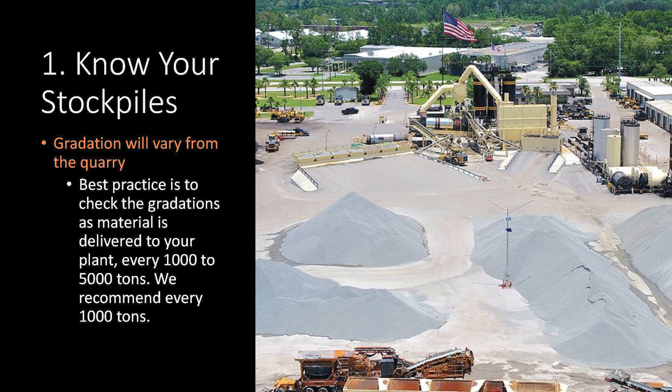So a very important part of being effective producers is knowing those stockpiles and knowing the gradations within them. Best practice always says to check the gradations of incoming material every 1,000 to 5,000 tons. We recommend every 1,000 tons, or we do it every 1,000 tons. If things are critical, like after COVID when we went through logistics issues and were getting hand-to-mouth aggregate, then we tested it daily as it came in because you didn't know what you were getting. So it depends on the circumstances as to when you want to pay close attention to these gradations, but it's a major part of it.

This has to work on both the plant side and the QC side. Of course the QC is going to be doing the testing, but the plant has to recognize when this aggregate is coming in and make sure those tests get done.

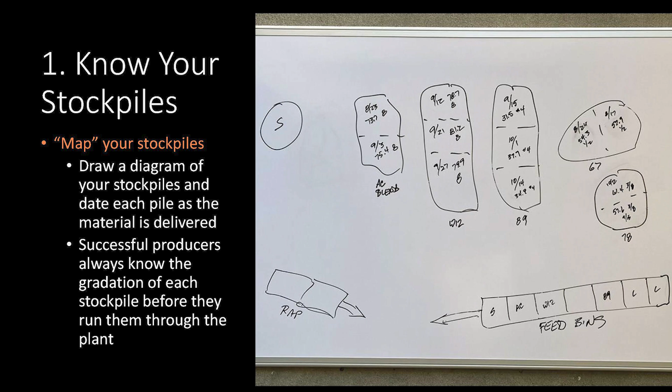This seems kind of crude, but this is the whiteboard in my lab. When the aggregate is delivered, we run our tests. We try to get a minimum of 10 tests, get a 10 average, and get our sieve result for the size of stone we're bringing in. We have notches in our stockpiles, shown as those little dotted lines, with dates and the gradation of the target sieve we're looking for.

As we pay attention to our stockpiles while producing, and we get back to that part of the stockpile, we know we might have a change coming up because we might have a different target or gradation on that target sieve. That's why we put this up on the board and keep up with it. A dry erase board, it's easy to do.

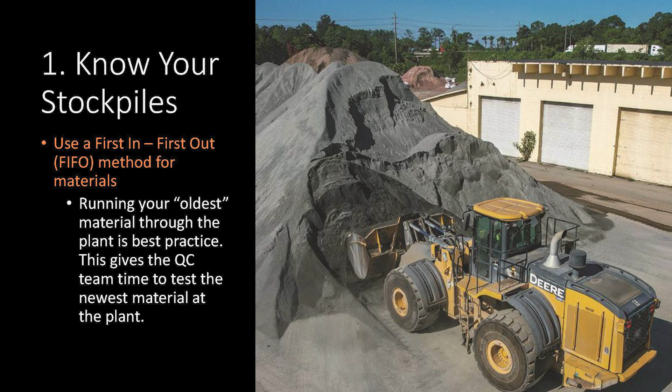We always use a first in, first out method. Picture our plant: US 1 is out front, and trucks come in and deliver, so naturally they put the aggregate on the front of those piles. Then the loader driver digs from the front of those piles and puts it right in the bin, so it's last in, first out at our plant. But we try to make the trucks go around back and take a cell at a time where those notches were, using first in, first out. That way you know what those gradations are.

We separate them into cells like I was talking about, and you can do it left, right, front, center, whatever. As you run out and get into that cell, start recharging it. Leave a little gap so you have time to get your QC test, get at least your 10 samples so you can target that controlling sieve you're looking for. Keeping it separate is the key before you stack it up and pull it all together.

We use blend sheets to adjust our mixes all the time. It's never a call from me or one of my technicians saying, hey, let's take 2 off the 7s and put 2 on the screenings. We always take the gradations that we have.

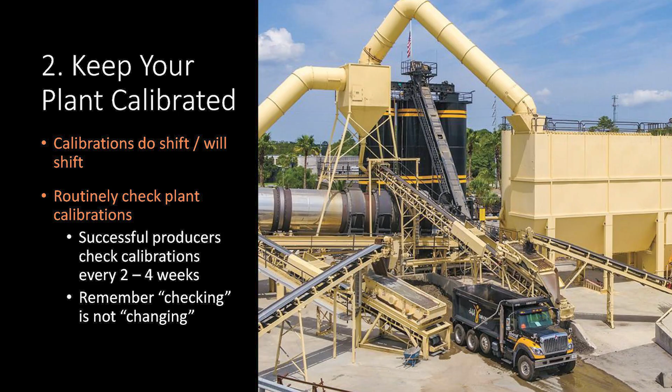Let's talk a little bit about keeping the plant calibrated. Effective producers check calibrations every 2 to 4 weeks. Check them, not change them, just check them. Changing is a lot more involved.

But if you have a day paving that's a little slow, with a 3-hour gap because trucks are going a long way and taking time to come back, you have an opportunity to check a calibration—it might be just one bin. Pull a truck underneath the belt, check the calibration for that one bin, your most popular. You know what you're running, whether you're using 3/8 stone heavy that week, just check it. Check it at a low ton per hour and a high ton per hour. It's very important.

With that, checking those calibrations lets us be proactive. Machines wear out, problems develop—it's just true, it happens all the time. Well, not all the time hopefully, but it happens. We're trying to be, what I like to say, fire marshals instead of firemen. It seems like in the asphalt industry we're putting out fires all the time, and we want to be proactive and be a fire marshal so we don't have to stress ourselves out.

If you do find a problem with your calibration, notify the QC department, because you may have been adjusting that mix, trying to trick it to what the plant's giving you—I call it voodoo asphalt, making some voodoo asphalt. Then the plant folks recalibrate the plant, and next time I run it, it's going to be somewhere else. So let them know, so we can take a belt cut of the rock or whatever and see what our gradations are giving us. Communication is the key.

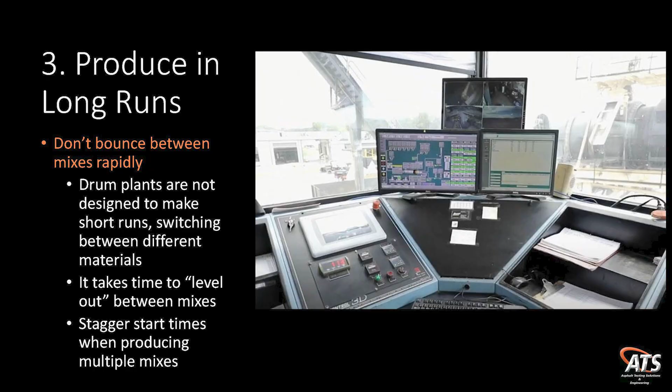Producing long runs - don't bounce between mixes rapidly. Drum plants aren't designed to make short runs, switching between different materials. They take time to level out between mixes, so you may want to stagger your start times. Everyone gets a trucking schedule every day. If you're making 2 or 3 mixes, you want to start one mix, get those trucks out of your yard, go to the next mix, get those trucks out of your yard, and so on and so forth.

Perfect example, a few weeks back, during the middle of the day, we were making 3 mixes at the plant on the north side there, Lance, and had a plant issue. All the trucks came back. We had no mix, got the plant going, and now we got to get those trucks all back out. The plant operator decided to make 2.5 loads of the 9.5, 2.5 loads of the 12.5 40% RAP, and 2.5 loads of the polymer, which is going to a DOT job. Kept going back and forth, back and forth.

Well, the DOT, they sample randomly for our pay. Lo and behold, that sample came on one of those switchover loads. Switching over, boom, air voids fail, 1.5, just terrible, terrible gradation. So instead of the DOT just looking at that one sample or that one situation, they don't know, they weren't there. They have an inspector there, but he's not up in the tower.

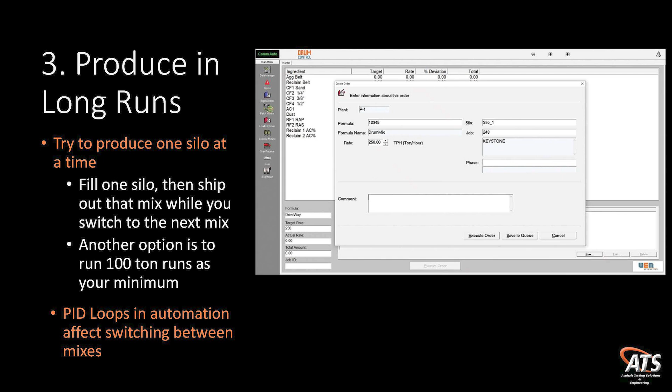Keep that in mind. Try to produce one silo at a time. Fill one silo, then ship out the mix, just like I said. Or another option is just make 100 tons at a time - make 100 tons for this guy or for this crew, get that out the door, make 100 tons for this crew, get that out the door.

That way, at least you know you got that 4 or 5 truckload window in there to know that your plant's leveled out, your mix is on, your mix is good. It's all coated with AC, you got the right gradation, all that.

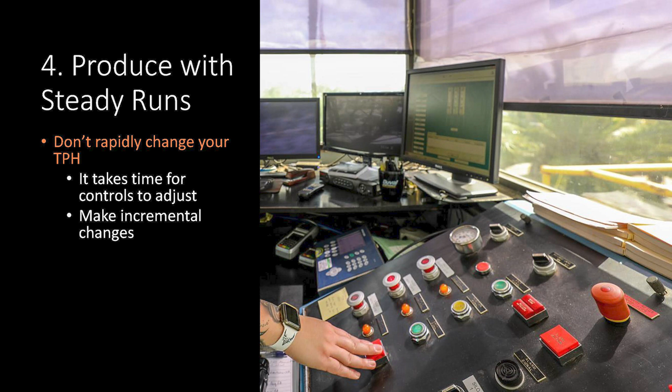Producing steady runs - see this a lot. They get behind, they want to ramp up the tons per hour. So they're clicking along running at 200, 220 ton an hour. They get behind for whatever reason, overtruck the job, whatever it is, and immediately just set the plant at 300 tons an hour. Well, you're going to get some of that voodoo asphalt in between there. If you get caught on a random sample on DOT, guess what - the milling machine's behind the paver instead of in front of the paver, which is what we don't want.

Make sure you're running your tons per hour. If we got to go up, that's what they're made to do, go faster and faster, slower and slower - even going up or down, small increments, go up 20, 25 tons an hour. Just increase slowly, let it level out, increase slowly, level out, or decrease slowly and let it level out.

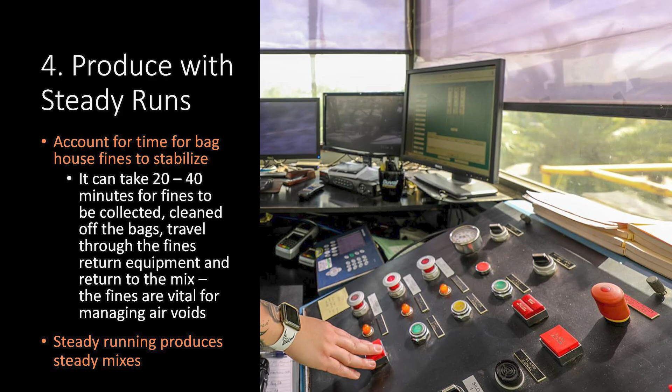The reason why - it can take 20 to 40 minutes for fines to be collected, cleaned off the bags, travel through the fines return equipment, and return to the mix. And the fines are vital for controlling air voids. They're vital to the mix. We love our fines - it kind of acts like AC, helps us fill some voids in there.

And I see some mix designers in there shaking their heads. One of my mix designers back there, we had dinner last night - you like those fines too, don't you? Oh yeah, unless they're too much, then they're blowing the air voids.

Steady running produces steady mixes. So that plant we started up, we got it nailed. We're running 240 tons an hour, and we can run that all day long. Everything, the plant's calibrated, we know our stockpiles, we got good mixes. You can make great mix all day long. When we stop and start is when we run into issues.

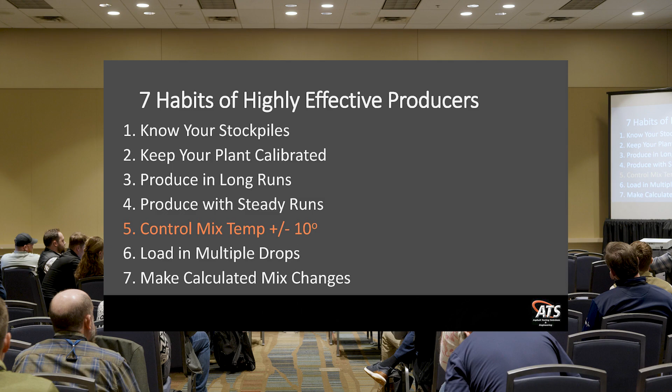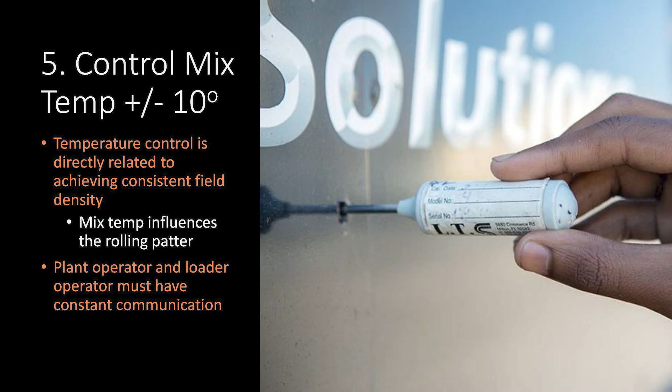So what about the temperature? Effective producers at the plant control their mix temperature plus or minus 10 degrees. Is that possible? I see my plant guy shaking his head yeah. I've had plant guys tell me you can't do it, there's no way. Well, if you lay a $50 bill on that console and say you can control it within 10 or 15 degrees, you get that $50 bill, he'll do it every time. Guarantee you. It can be done, it needs to be done.

Temperature is very important out in the field for getting density of our mix. That's the most important part of that mix. When it gets to that paver out there, we've got to get density, right? Super pave works at temperature. Trust me, if you've got consistent temperature load to load to load, you're going to get consistent density out on the road. You get cold load, hot load, cold load, hot load, your density is going to be all over the place. It's a proven fact.

In Florida, we break down our pay quality characteristics: 8 sieve, 200 sieve, asphalt content, air voids, and density. Density is 40% of our pay, that's how much they stress it in Florida. Our good friends at the Asphalt Institute tell us you can take the worst made mix, get great density on it, and it'll last you 18 to 20 years. And you can take the best made mix, put it out there, not get good density, and it'll tear up in 10 years. So that's how much it means.

Temperature is the number one thing to help you at the plant to getting it out there. A lot of that is the plant operator and loader operator constantly keeping in contact. We don't want any bins to run out, especially if we're making a RAP mix. The RAP runs out, we're in trouble.

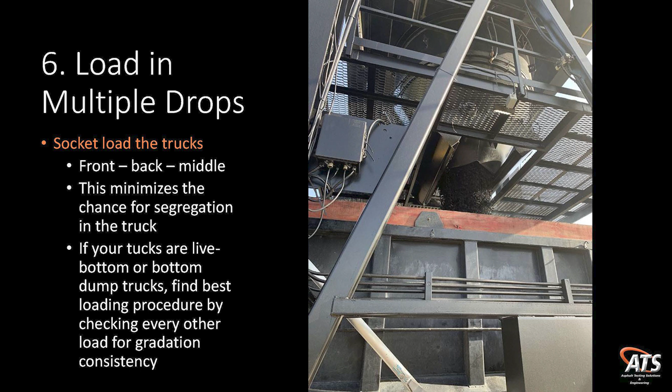Let's talk a little bit about loading those trucks. Load in multiple drops, we do 3 at all our plants. I've seen people do 2, I like 3 better, and we do a socket. You know what a socket is? We pull the truck up, get a drop in the front part of the truck, pull it all the way up, a drop in the back, back it up, and put one right in the middle. So you've got 3 humps in there.

This helps reduce segregation when we get out to the paver. When we put it in the paver, we know we've got 3 good drops in there. Chances are that mix is not segregated unless something was happening up in the silo with the batcher or whatnot. But chances are that if we load these right, we're going to keep our temperature and eliminate segregation.

I don't know if y'all use live bottom or belly dump trucks up here. You need to play with those a little bit and see the best way to load them to prevent segregation, because they all work a little differently. Some are V-bottomed and some are square-bottomed, and some hold 24 tons.

They've recently gotten into that in Florida, West Florida, and the central part of the state. They call it the belly dump, where they dump a windrow of asphalt out in the middle of the road, and they come by with the paver and pick it up. It's pretty neat stuff, but I've seen it and never been involved in it. I saw it when I was with the DOT.

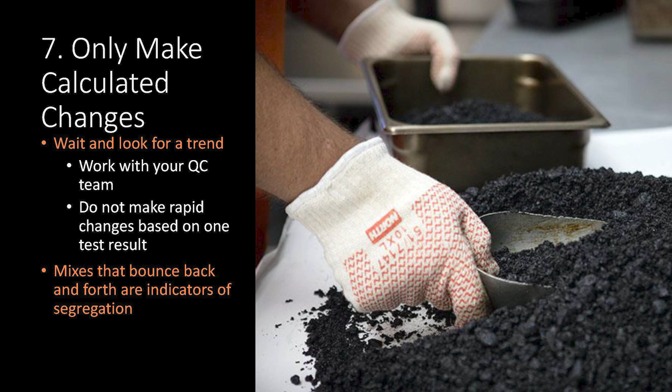Effective producers are going to make calculated mix changes. They're going to wait and look for a trend, work with your QC team. So if we're getting bad results, if we just get one bad AC reading that's kind of weird, we're not just all of a sudden going to add AC to the plant, or take it out. We're going to pull another sample. No knee-jerk reactions, because anything could have happened, it's a big machine. So we want to validate that result we just got. We don't want to make a rash mix design change.

There are times in the middle of the night and you're trying to protect yourself. If you pull a process control sample and air voids are looking a little high, we might want to put a tenth of AC in to bring those down as a quick fix. That's kind of different, but even those, I don't like them. I like to get another sample and see exactly what's going on.

If quality's truly driving your operation, then your management is not going to be mad that you slowed production down or slowed the paving down to work through that problem, get another sample, work it out so that we can send a quality mix out there for our pay factor as well as what we're putting out on the road.

What we do is important. I hope everybody knows that. We build roads that everybody drives on, and we ought to tell our folks every day that they're important, down to the shovel guy at the plant. You just gotta, you can't stress it enough that what we do is very important.